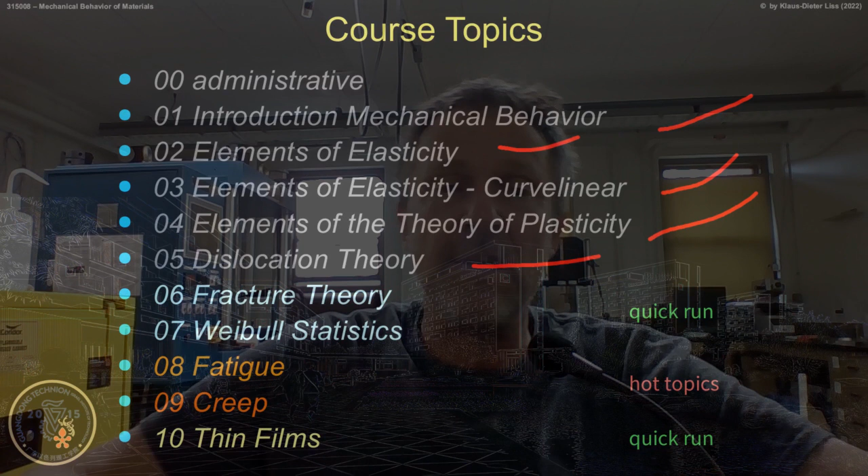There are still 5 other chapters left in the syllabus, namely fracture theory, what we start today, Weibull statistics, that's also about fracturing, breaking, failure. And then we come to fatigue, this is cyclic deformation, and eventually you also get fracture and failure. Subsequently, we get creep, a relatively important topic I want to emphasize in this course. And thin films, and that's about it.

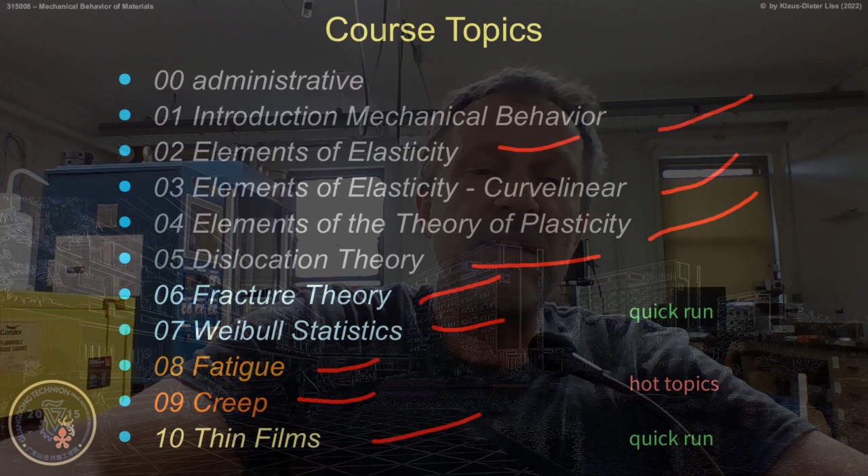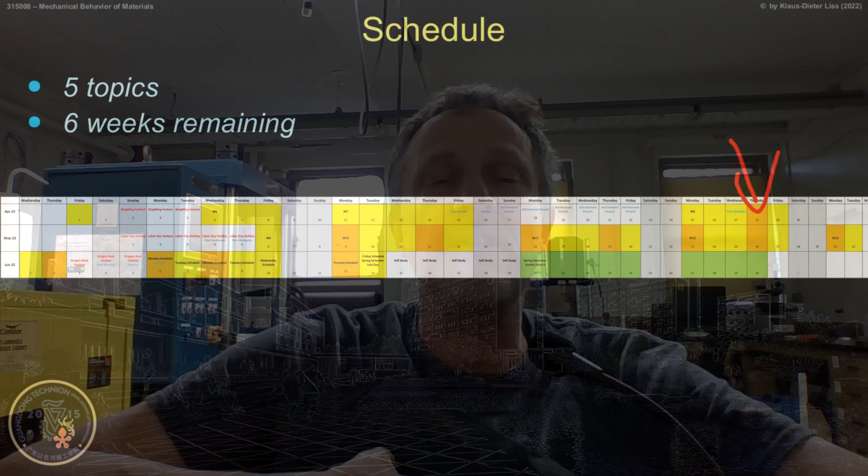So if we look now to the remaining lessons we have, today we are here on a Thursday. Then we have, including today, 12 more lessons divided by 2 gives about 6 weeks we have. Out of the 13 weeks, so we are now 1 week over the mid of the course. We have 6 weeks remaining and we have 5 topics.

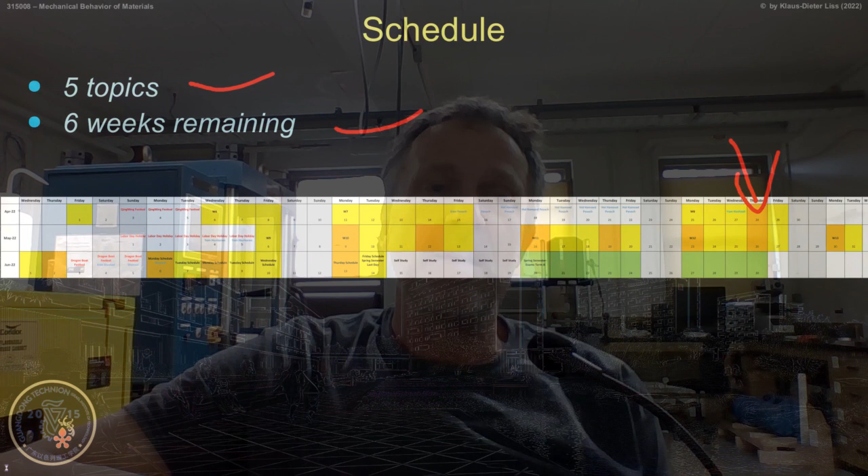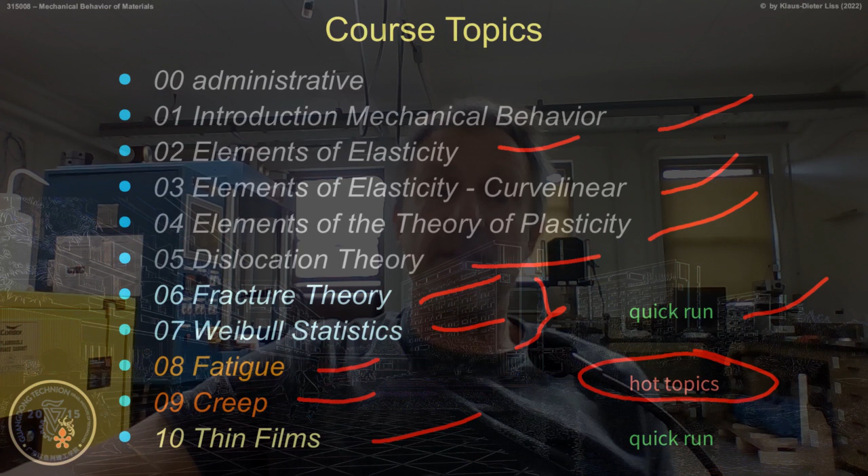You will see the presentation today has about 100 slides, maybe 95 slides, something like that. So I have to get a quick run through some of the topics, namely fracture theory, Weibull statistics, because I also want to spend time on fatigue and creep, which are hot topics in research. And as we are material scientists, not so much mechanics people, we want to understand the physics, what's happening inside the material. And also thin films. I will see how much time I have to talk about the thin films, but at least we should have 1 week for it. So we have 5 topics, 6 weeks.

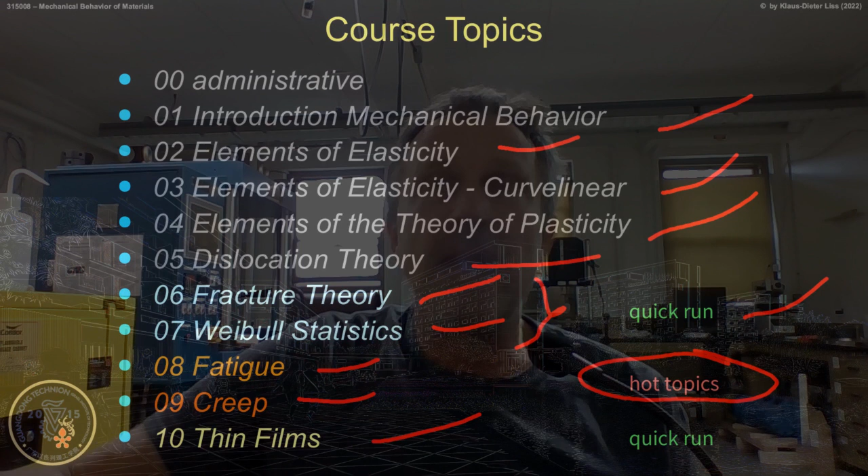I'm sure we're running out of time, so I have to hurry and cannot go into detail of each of them.

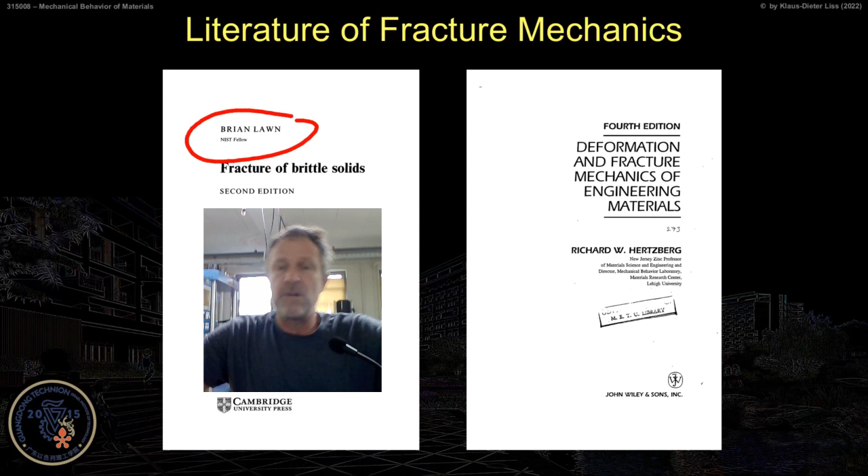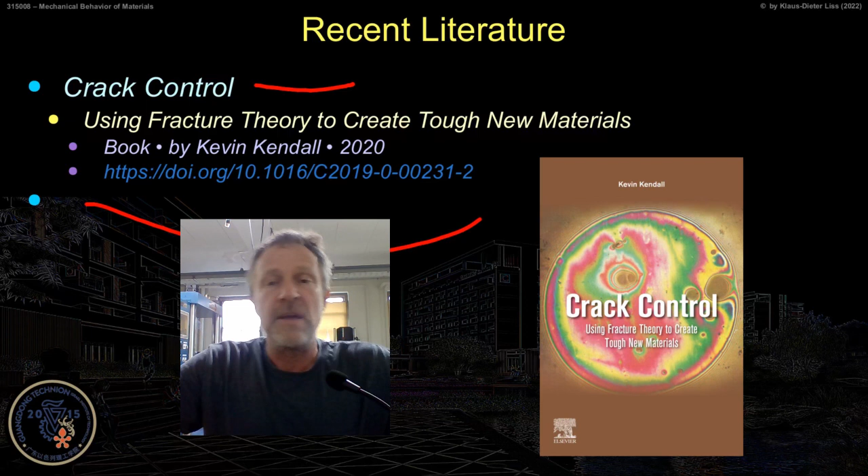And well, actually just today, I looked up, Google is always a good start to look up things to refresh them if you don't know them or want a reminder. And I found this literature on crack control. I haven't read it, but it is using fracture theory to create tough new materials. So it resumes a little bit about the past, about what I will teach you today, textbook knowledge. Not so much teaching, also discussing textbook knowledge, but then how to apply that to create tough new materials. There's a DOI, if you're interested, look it up. If you have a Technion account, you can download it through the Science Online Library.

Okay, let's get started here. This looks very much like at the beginning when we started to look at the theoretical strengths under shear. And we do the same now, looking at theoretical strengths under tension in the atomic potential.

And you remember we have approximated this behavior. So we have a strong force and then we have a not so strong force as we go far away. So we have to overcome a strong stress here, which increases with displacement x or u we had in the past strongly, but then as you go over a certain maximum, it decreases again because of these attractive and repulsive forces and potentials we have.

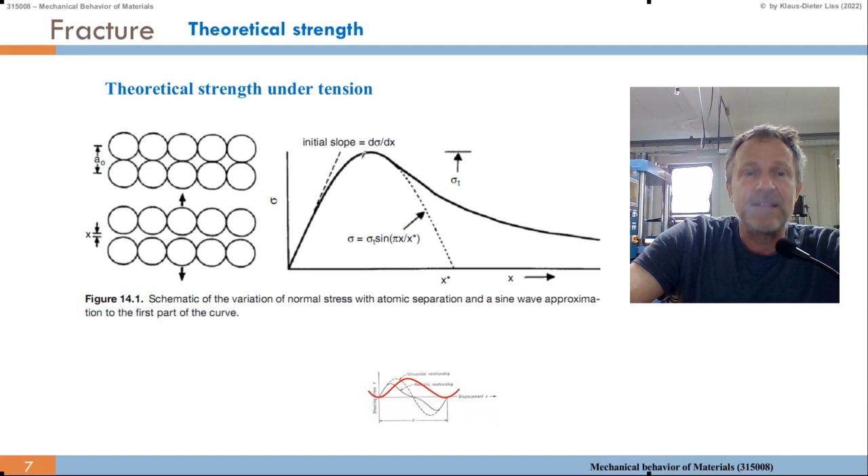We know what happens in the potential landscape when we pull atoms apart: a linear increase to a maximum, then a decrease. We can approximate this maximum by a sine function: sigma equals sigma-t times sine of pi times x over x-star, where x-star is the point where x over x-star becomes pi and it goes back to zero. This describes the slope at x equals zero for small strains and small displacements, and the slope is d-sigma over dx.

So that's the schematic I've discussed already. We assume, as written again, sigma equals sigma-top times sine of pi x over x-star, where x-star is this virtual point.

We assume Hooke's law for small deformation and tension: sigma equals elasticity modulus times epsilon. The displacement-strain relationship, epsilon, is du over dx in general coordinates, which here is x, the change of displacement divided by the atomic distance a0. Back to Hooke's law, sigma equals E times x over a0, and then we get the sigma-x relationship for small deformation, which is this sine function.

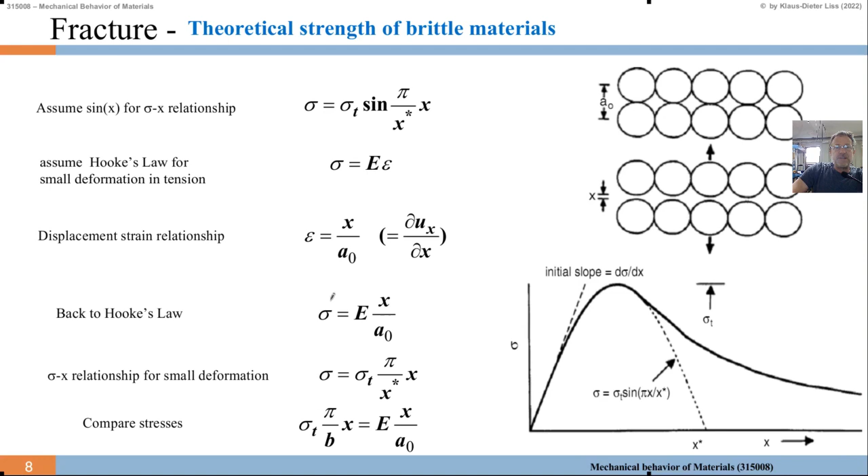We can Taylor expand the argument, giving sigma equals sigma-t times pi over x-star times x, replacing the sine by its argument. Comparing the two stress expressions, sigma and sigma, we get sigma-t times pi over x-star times x equals E times x over a0.

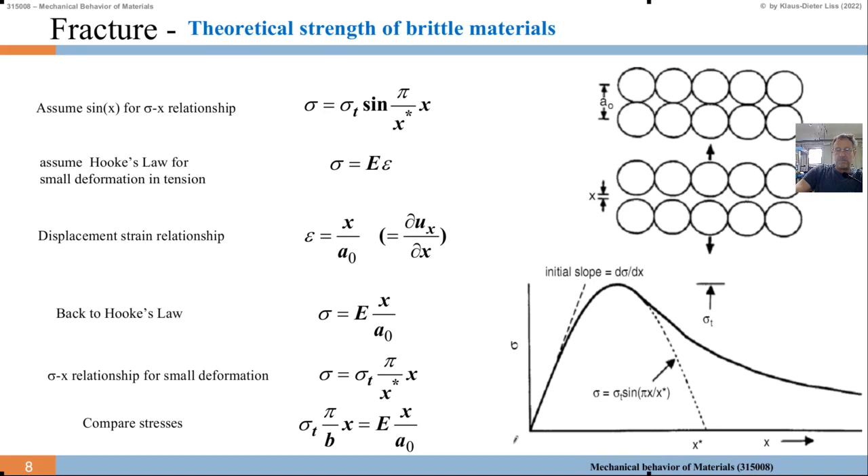We can also assume x-star is approximately of the order of magnitude of a0, and then sigma-t reduces to E over pi. That is the theoretical strength in the tensile experiment when we look at atomic potentials and atomic forces.

The experimental strength in megapascals is often less than 1 gigapascal. Sometimes we have 13 gigapascal for the iron whisker — whiskers are very strong, about 15 gigapascal. The silica fiber, also very thin fibers, 25 gigapascal. But still there is a lot of discrepancy compared to the theoretical strength.

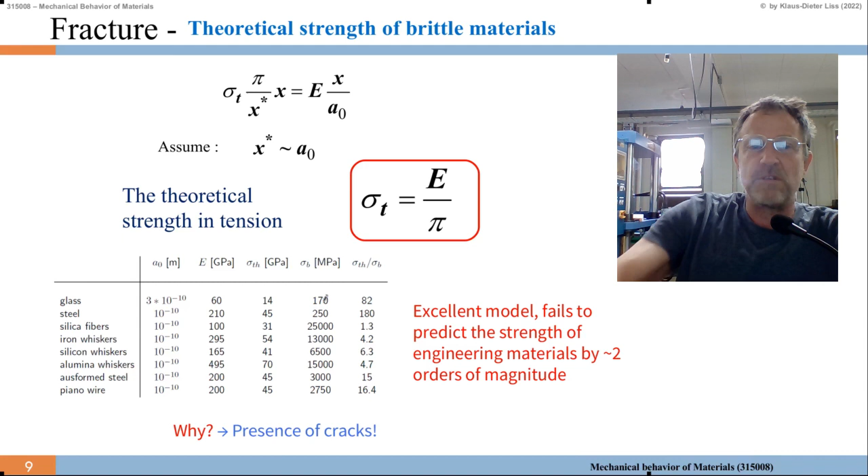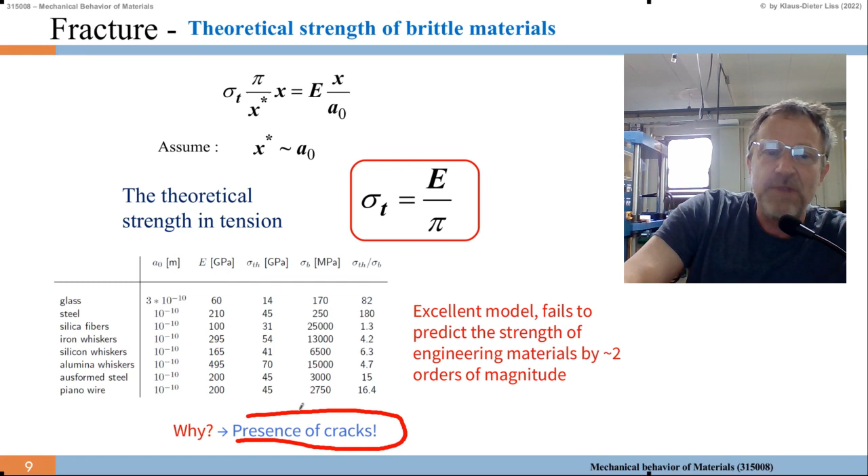So why does this excellent model fail to predict the strength of engineering materials by approximately 1 to 2 orders of magnitude in most cases? This is because, whereas before we had dislocations, now we say there are no dislocations but the presence of cracks — this is for brittle material. Dislocations are for ductile material; here we're discussing brittle material. So what is the weak point in brittle material? The presence of cracks — there are always some inclusions, some distortions.

If we have a distortion, hole, or precipitate — let's say we have a hole — we've done these calculations in the theory of elasticity section, and we know we get stress concentration at the border of the hole, at the surface, at the boundary: 3 times the stress at infinity. If we apply a stress sigma-infinity, it amplifies to 3 times at the surface radius of the hole.

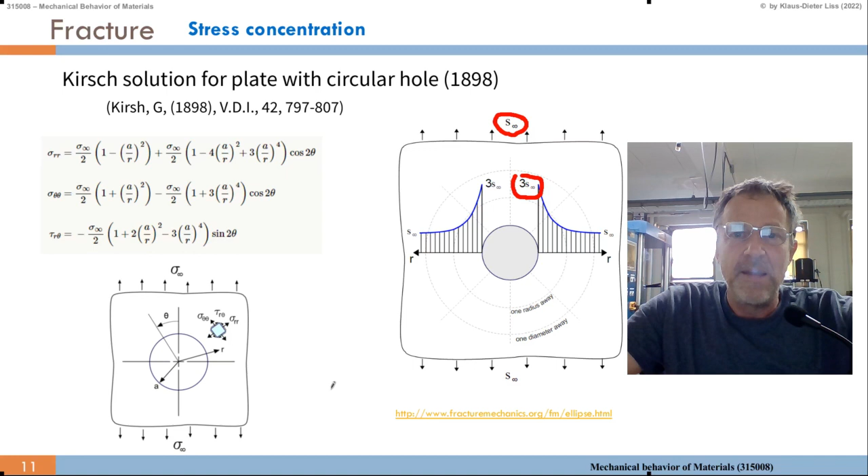One radius away, two radii — one diameter away — it becomes lower and lower. Remember these formulas, you can look them up: sigma-RR equals sigma-infinity over 2 times (1 minus A over R squared), where A is the radius of the inclusion, plus these cosine terms. Looking at the total stresses, they become up to 3 times the stress applied at infinity. This is stress concentration: even if it doesn't yield at infinity, concentrating the stress makes it higher.

Now based on this, Inglis, the author, made this model in 1913 by describing a crack as an elongated ellipse.

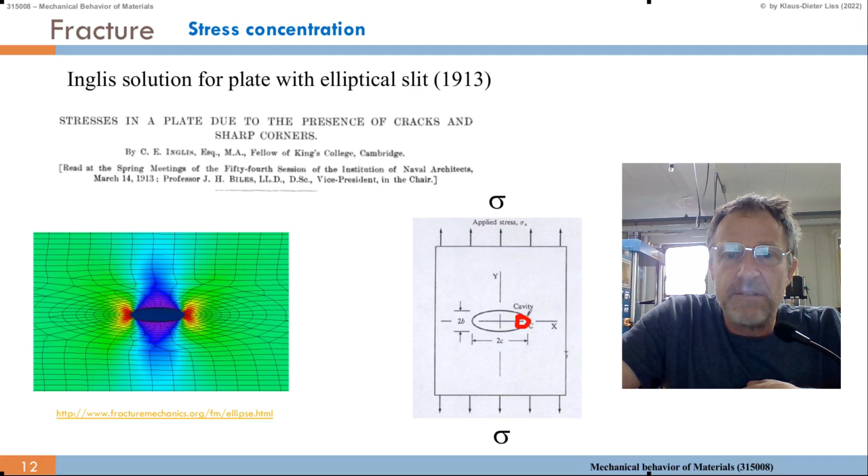The ellipse has some radius of curvature here. If I make it spherical with the smallest radius of curvature here, then I get the highest stress concentration. This scales with A over R, so I get the highest stress concentration at this point where the radius is smallest.

We can write down this solution for a plate with the elliptical slit, which he wrote down in 1913. So I have an opening of 2C, the crack, 2C long and 2B high, wide. That's the crack opening, 2B, it's an ellipse with the two axes. The long axis, or half axis, is C in the horizontal, longitudinal direction, and B, the half axis, so to say the radius,

in the vertical, along Y. And Y is where we apply the stress, sigma A, sigma applied. I mentioned the radius of curvature here in this corner - this is where it is smallest, and where it's smallest we have the highest stress concentration.

We can describe an ellipse like this: x squared over a squared plus y squared over b squared equals 1, or solved for y, it becomes this formula. Then we can calculate, in curve theory, linear algebra, the curvature here, which turns out 1 over rho - the curvature equals y double prime divided by 1 plus y prime squared to the 3/2. This is mathematics on the ellipse.

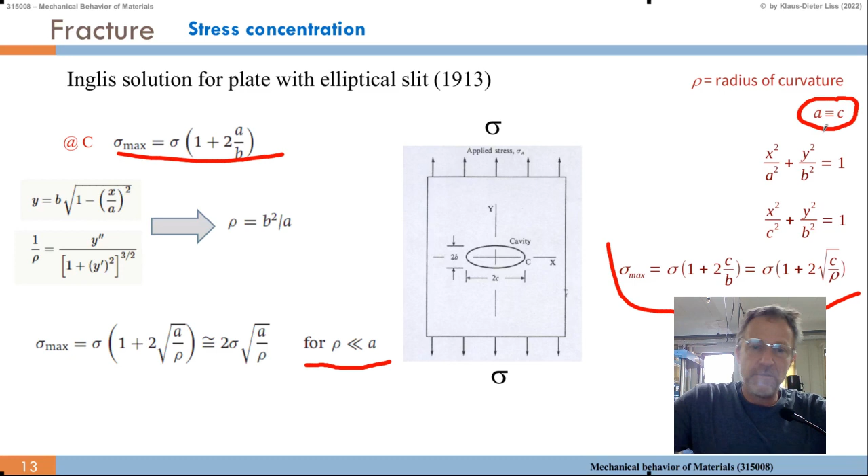Because these slides are mixed, I copy that here again. So let's say now c equals 3 times b, or a equals 3 times b here. Then we have 3b over b - this gives a 6, plus 1 is 7. So sigma max over sigma becomes 7.

If we have the ellipse, we have here the maximum curvature, which is one over the curvature radius, so minimum curvature radius there. And if we apply the stress in the y direction, then sigma critical, or sigma max, becomes 7 - the 6 plus 1. 6 times through the stress concentration, and 1 times through the applied stress. This is the sigma yy.

We also have sigma xx, in this direction here, in the horizontal direction, the normal stress. This also concentrates a little bit, but not so dramatically. Of course, if you pull in the vertical direction, then the vertical stresses become larger. And we can imagine this, yeah?

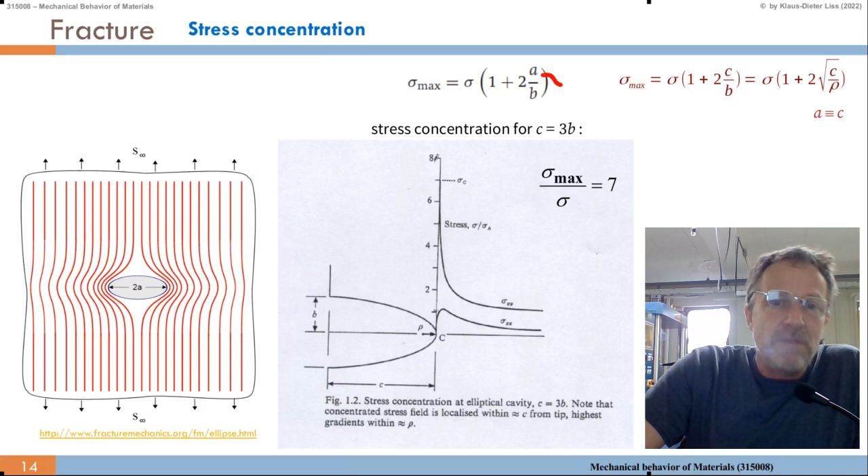We spread the material, and the longer the crack is, the more lever arm we have to the point of the crack tip. We call this the crack tip here, where the rho is minimal. So the long axis of the ellipse is at the crack tip. And the larger the 2a is, the more lever arm I have, and the more concentration of stress I get. So this makes sense physically.

I repeat that here again. So the stress concentration by the half-axis A or C is shown here again, that sigma max equals sigma infinity times 1 plus 2 square root A over rho. Or if we express it in A and B, not in A and rho, then we have the formula here at the top, because rho, you also may want to remember this, is B squared over A.

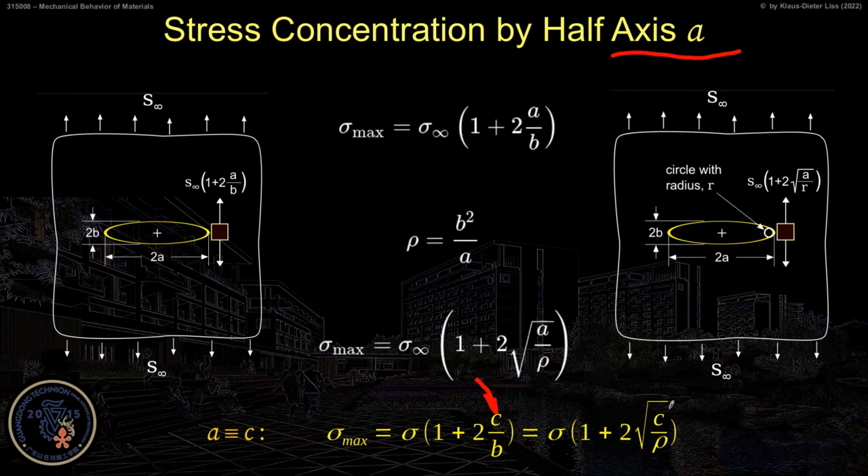And here I have the same formula, just replace A by C, because sometimes we use the C.

So this is the Inglis solution. He formulated that in 1913. Sigma max over sigma is 1 plus 2a over b.

So the question is, can it serve as a tool to predict fracture? Now let's take a small crack. A is 100 micrometer, B is 1 micrometer, so A over B is 100. Putting that in gives 2 times 100 plus 1, which gives 201. So we have a huge stress concentration.

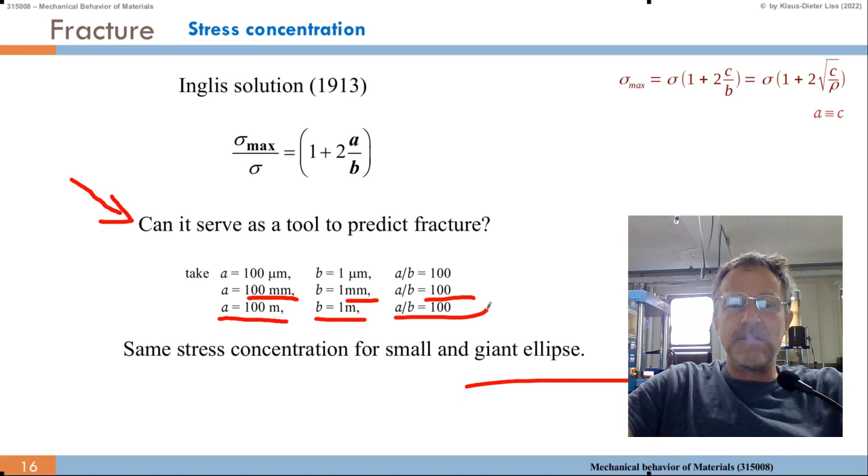But we can also say A is 100 millimeter and B just 1 millimeter, then we have the same A over B ratio. And if we make a giant ellipse of 100 meter length A and spacing B 1 meter, we still have the same aspect ratio, A over B.

So the stresses are the same. If I have a big ellipse, a medium-sized ellipse, or a small ellipse, the stresses around an elliptical hole in a stretched Hookean sheet remain the same as the hole size changes.

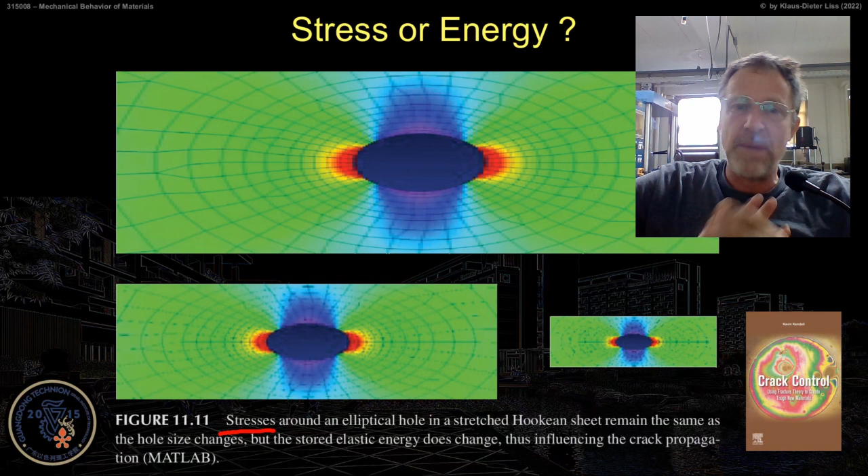But the stored elastic energy does not stay the same, because the stress field in a big ellipse is much larger than in a small ellipse. The release of that stress field and the stress energy can make much more damage than in the small one. That's why it would not scale in an experiment with just A over B.

So therefore we have to consider a different theory, and there Griffith, A. Griffith, of the Royal Aircraft Establishment came into play. He did experiments of bursting tests, bursting balls.

He took these balls, glass spheres, like Christmas balls, hollow inside, just the spheres, and he scratched them with different lengths and depths of scratches, so he could test when they shatter under compressing them. He did it with balls and he did it with pipes.

So he had spherical bulbs, like a light bulb, and he had circular tubes, elongated tubes, something like a light tube.

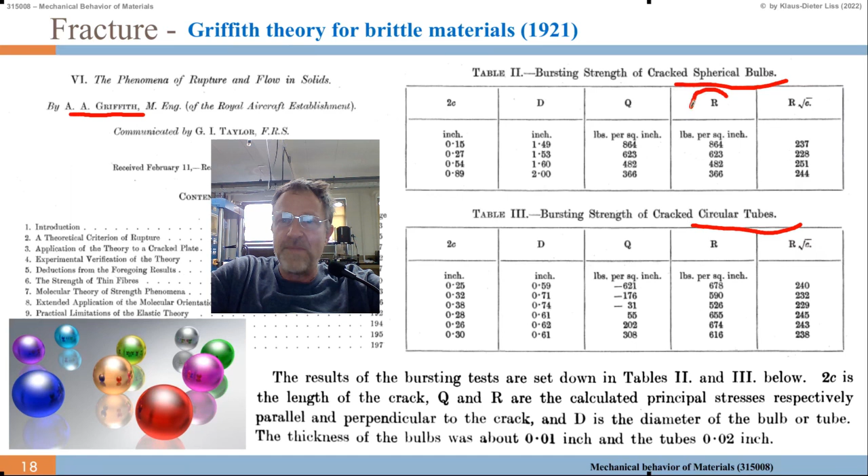2c is the length of the crack. Q and R are the calculated principal stresses, perpendicular and parallel to the crack. Q is parallel to the crack, and R, that's what we're interested in, the higher one, is perpendicular to the crack. D is the diameter of the bulb or the tube, sphere or cylinder.

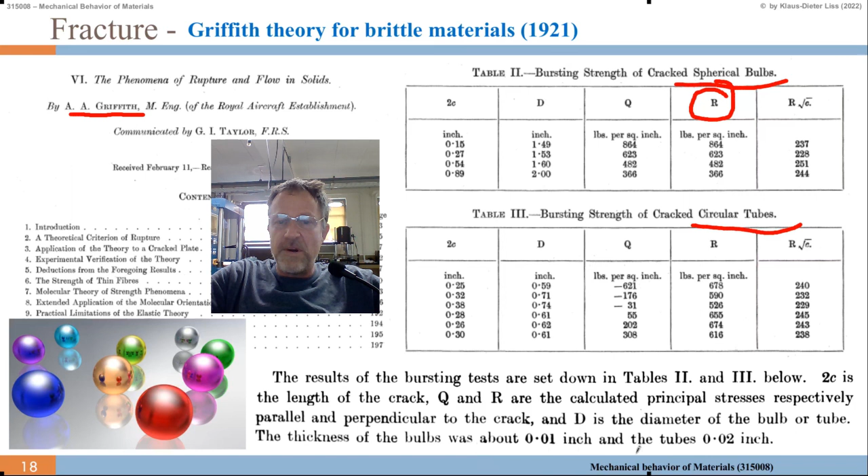The thickness of the bulbs was about 0.01 inch - homework to convert that to millimeter. And the tubes were about 0.02 inch.

He found that R times square root of C is more or less a constant: 237, 228, 251, 244. He also varied 2C a lot, and he also varied the diameter, but R times square root of C turns out to become a constant in his experiments.

He did the same for the pipes, the circular tubes, with different diameters, not varying that much. He had different crack lengths, and then he calculated the hoop stress per square inch to apply, and found, or measured, similar values: 240, 232, 229, so between around 240.

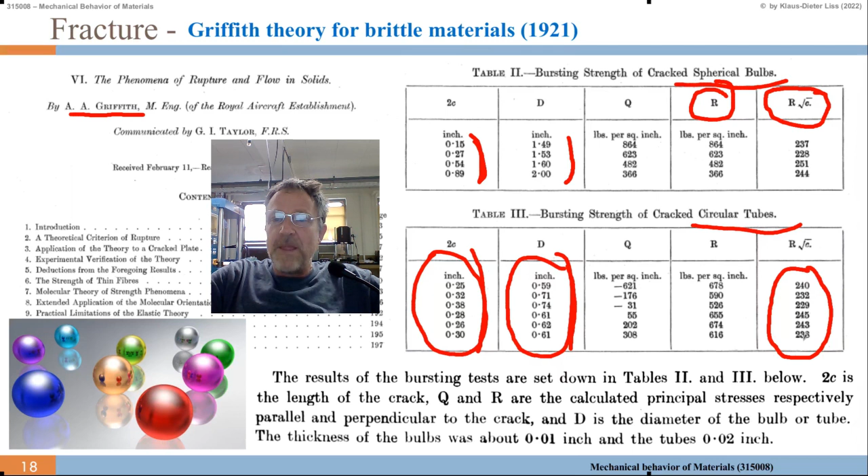You can go through the numbers. So he noticed a constant value in his fracture experiments of glass, namely sigma infinity, the applied stress at infinity, not at the stress concentration, times square root of A or C, is 2.6 times 10 to the 5 Newton meter to the minus 1.5. I just wanted this unit because sigma also is in Newton per square meter. And this is within 5% error.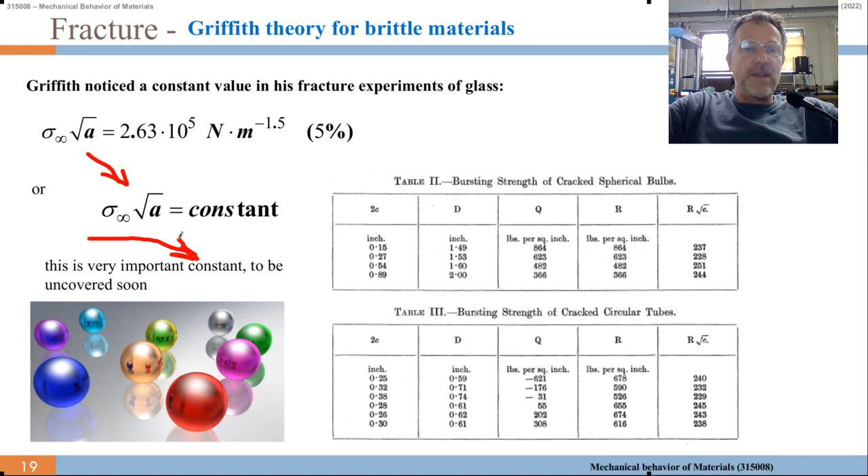Or, in other words, more generally for a material, sigma times square root of A or C is a constant. This is the same table I've shown before, and that's a very important relationship, which we'll uncover soon in this lesson.

So Griffith then looked into the energies, not into the stresses sigma, but he looked into the energy in a reversible thermodynamic energy balance, telling that the total energy equals the mechanical energy and the material energy. So the mechanically applied energy and the energy which is in the material.

With mechanical energy is the external workload, WL, plus the strain energy. So I stressed the material, it strains. And we know already in a strain field we put some energy, UE. And we have the material energy, which here we just say this is the US, the free.

And now we have to calculate the forces we get by sigma times the area A. So A is the area and B is the breadth. If I have the crack in 3 dimensions, the whole body is in 3 dimensions, then this length here is B, how broad it is, the breadth, the thickness of the material. So 2A times B, this is the area. 2A is the crack length, times the width, the deepness, the breadth, is the area A, and we can work it out.

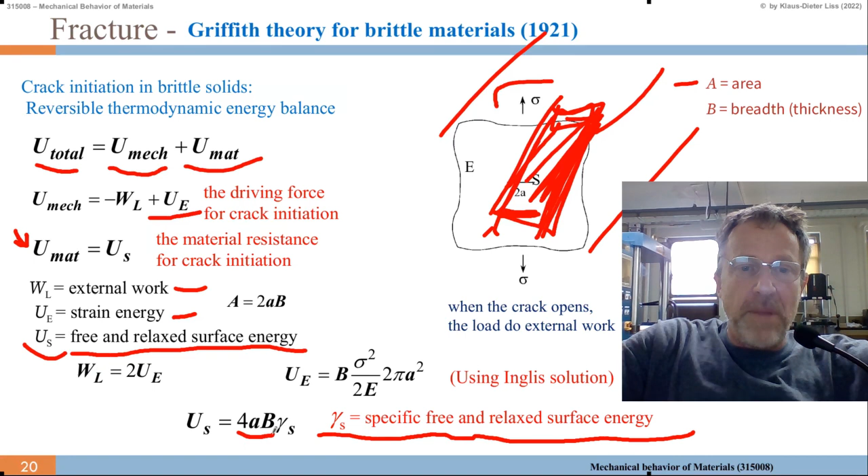So now we look to these different energies. We have the mechanical energy, and we look to the change of energy. So the crack initiation occurs when we have this function here. We have such a function which has a maximum, and du over dA, it's a function of crack length A. If it becomes horizontal, so the derivative becomes 0, then I get crack initiation.

We have these two terms, so d(U mechanical) over dA equals minus sigma squared over E times 2 pi A, and we have d(US) over dA, the surface energy, equals 4 times gamma S from the formula here. So US and UE.

If we plot US as 4 times gamma A, that means if I increase A, then the surface energy just increases linear with the length of the crack. That makes sense, the breadth remains the same. The mechanical energy, which is sigma squared pi A squared over E, and negative, we have the minus sign, goes down.

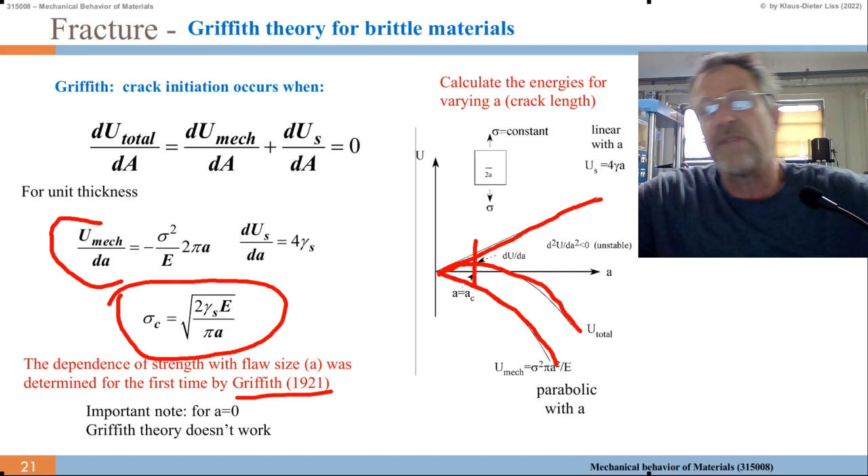So the crack initiation occurs again when du over dA is 0. And we have d(U mechanical) over dA. I think du should be minus sigma squared over E, 2 pi A, and the d(U surface) over dA equals 4 gamma S.

So because the second derivative, the curvature here, is convex, d squared U total over dA squared is smaller than 0, and that means this is an unstable equilibrium. If we are at smaller A than A critical, then the crack may close again. If we are at larger A than A critical, then the crack grows.

And that means if I have a load control case where the applied stress is constant and I go over this A critical, then I have catastrophic failure. And you can imagine that, because again, you have a lever arm, a small lever arm at the beginning, you have to overcome all the surface forces, but then eventually it opens and you get a long lever arm which easily opens the crack tip further. And then you go parabolic down on the energy scale, and catastrophic failure.

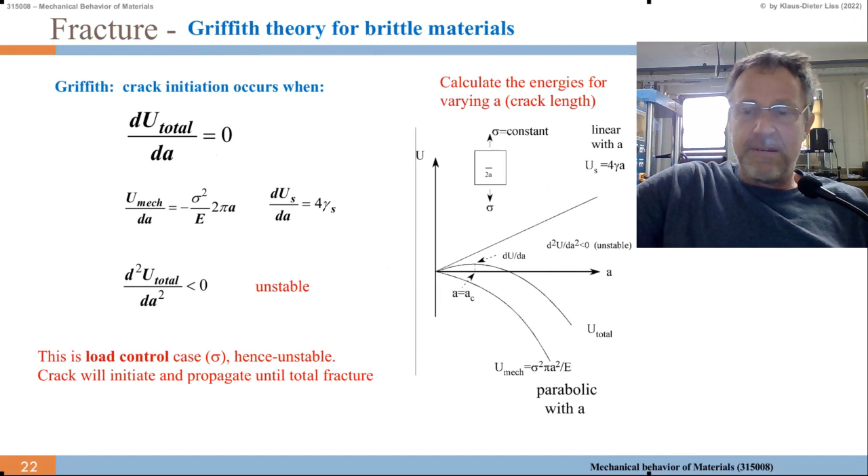Obreimoff did that experiment in 1930. He took this crystal, mica. Mica is a bit like graphite, it cleaves off. So you have lattice planes, horizontal crystal lattice planes, all in a single crystal, and you can cleave planes off. This is a so-called C-plane. It's a very anisotropic crystal.

What he did, he pushed it up here - I looked up his paper. He pushed up part of this cleaved lever arm, a little microbeam, by distance delta. Then he looked how far the crack propagates along this direction, or here we turn it around, the direction in this model.

Now the question is, we consider the problem of a cantilever beam. This is a small cantilever, which has some breadth B. In the Euler-Bernoulli beam theory, the boundary condition input is delta. If we lift it up by constant value delta, then delta equals P times A cubed over 3 E I, where I is the second area moment.

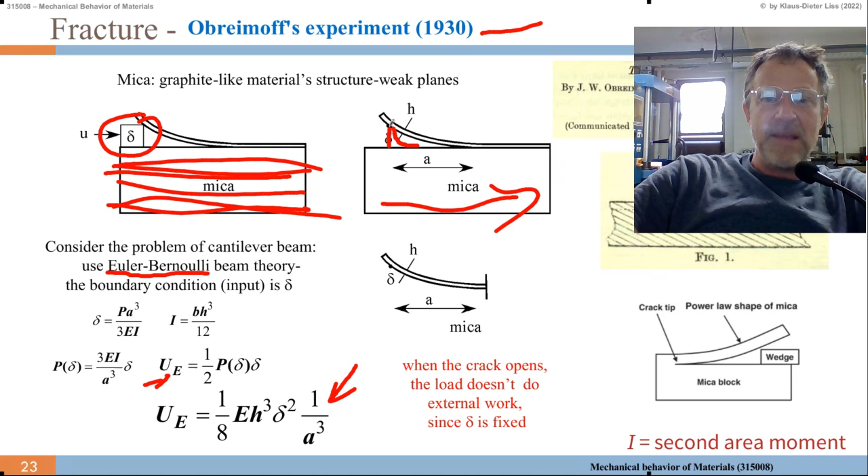And then maybe I start with a crack which is like this. That means the crack will grow, so it will grow until - we show it here - the surface energy goes up with larger A. And we just calculated the UE goes down with larger A, with the third power, 1 over A cubed. All the others are constant.

That means, again, I get a minimum here, but this time I have a concave curvature, open to the top. That means d²U over dA² is larger than 0, and this is a stable condition. That means if I make my crack longer than AC, it would cost me energy, so it would not grow longer than AC. If I have an initial crack shorter than AC, then it opens and opens and opens until it reaches this critical length A.

And of course you can imagine this, right? It makes total sense. If I lift up a piece and it has a steep angle, then I have a large stress concentration there. Now A grows - this is A1, this is A2 - grows, then the angle becomes shallower, and I get less stress concentration at the crack tip. Eventually, if it becomes A3, too long, then I create more surface energy than I would gain with the release of strain energy, so it would not propagate.

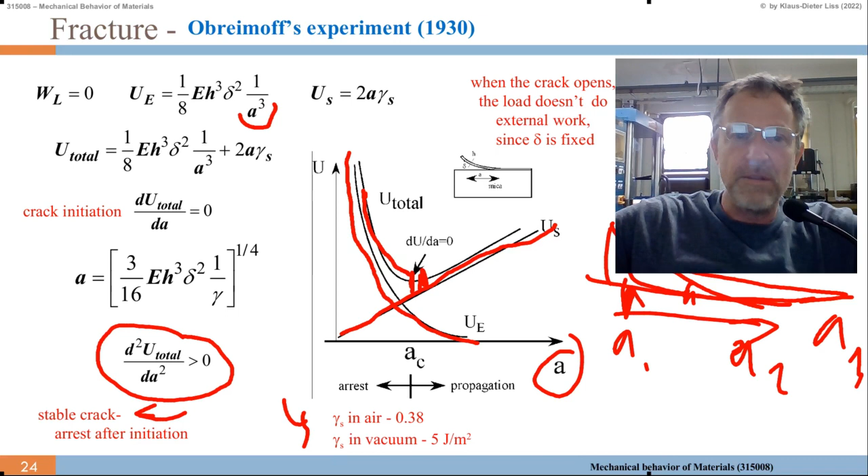So there are two major cases in fracture. The one is load control, shown in the figure to the left - this is unstable crack propagation. Imagine you have this form here. When the crack becomes longer, you have a longer lever arm A to the crack tip, so you put more torque onto the crack tip. That means the stress becomes higher.

Or you have this displacement-controlled situation where we can put it in the middle, for example, just for generality. If we displace and keep the displacement, like with the lever arm now in the center, then it grows to a certain length and it stops growing.

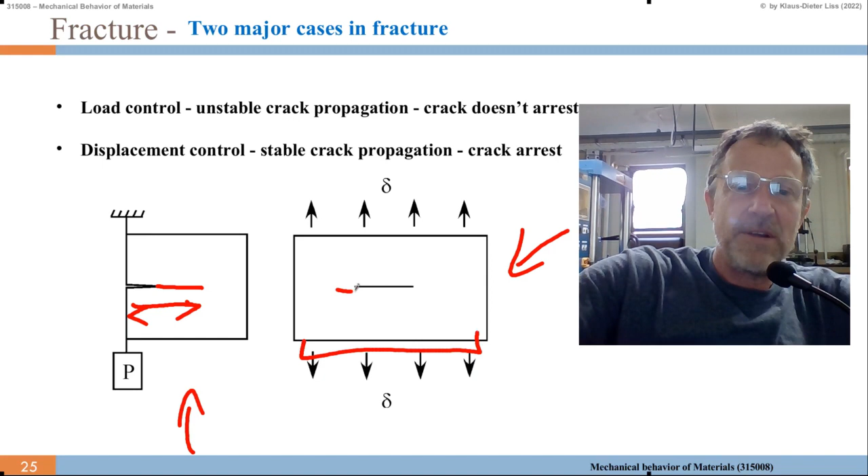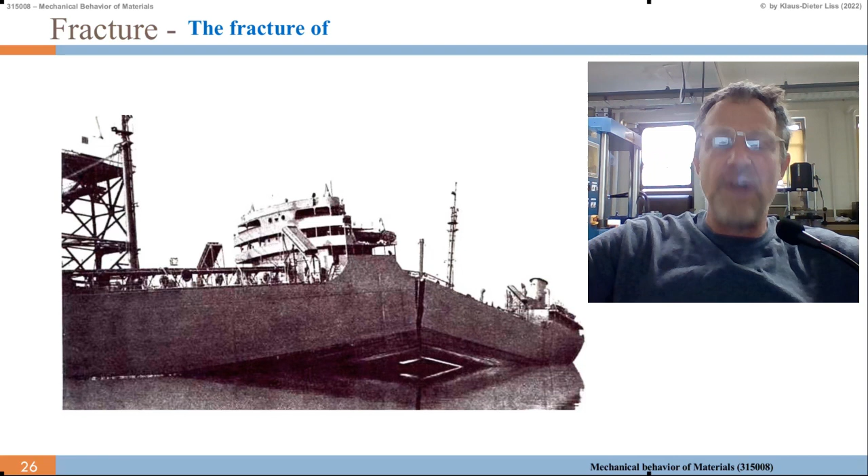So fracture is important because of these problems, as we showed - not just cracking the glass at home or Christmas balls or other nice things we have, but also big problems. We don't want ships or buildings to collapse. That's why it's important to understand fracture.

This was - I forgot where it was.

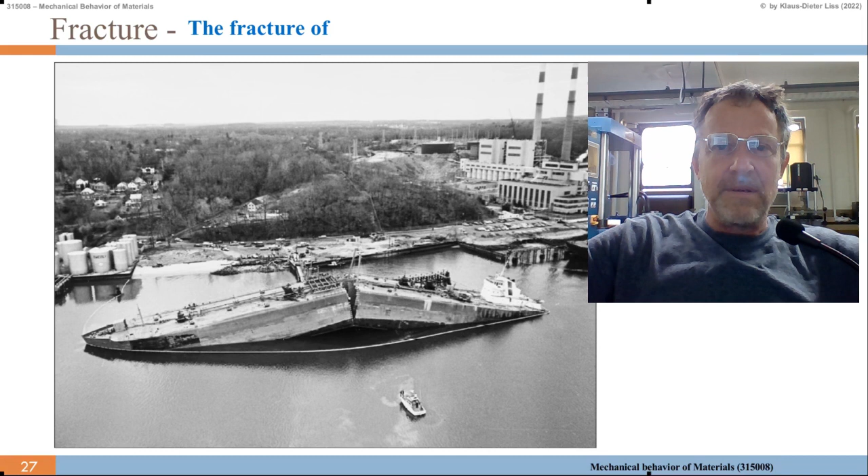In the Griffith theory, we can have two situations: the far field stress is constant and we increase A to some critical A. Or the crack length is constant and we start from zero stress and increase the stress until we reach the critical stress where A starts to move and yield.

And then what we put in for E. So for E, we put in E star, which is E for the plane stress situation. We have had the plane strain and plane stress formalisms in the two-dimensional formulation. You remember the Airy function.

And for E star, we put in E over 1 minus nu squared for the plane strain condition. So when we work it out, for plane strain E star is larger than for plane stress, because nu squared is smaller than 1, so 1 minus nu squared is smaller than 1. That's in the denominator, so it becomes a larger number than in the plane stress situation.

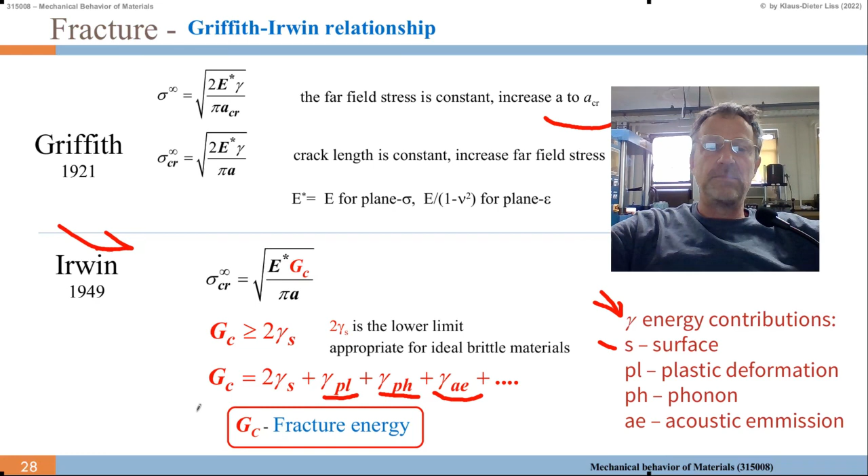So Irwin took the fracture theory one step forward and said the total energy is the workload plus the elastic energy plus some material resistance, Wg. So Wg, workload with respect to this G here, the fracture energy, is some material-dependent resistance.

We have a driving force: the mechanical energy has to balance the workload and the elastic energy. Then U, or d(total U)/dA, has to become zero for the equilibrium condition at the critical A. We work it out: dWg/dA equals G, which becomes a constant G, which we call the strain energy release rate.

SERR, SER, you will sometimes see it written as strain energy release rate. So this is a rate not per time, but per unit area of crack advance, with units of joules per square meter. And G equals d/dA of the workload minus the elastic energy.

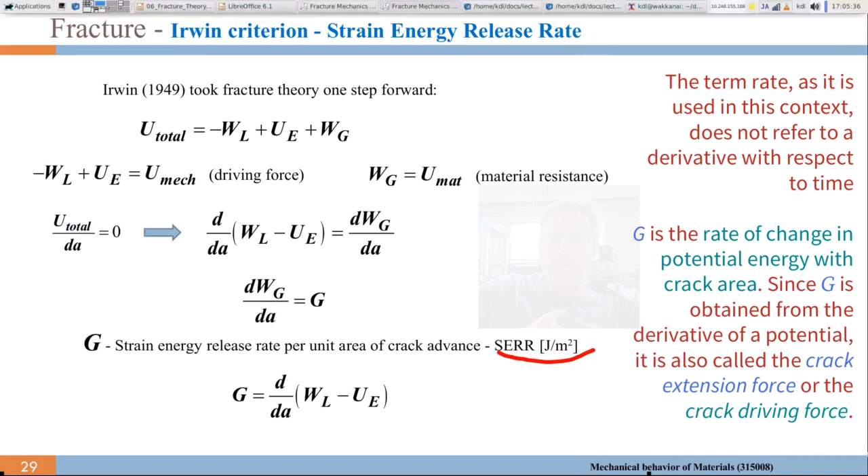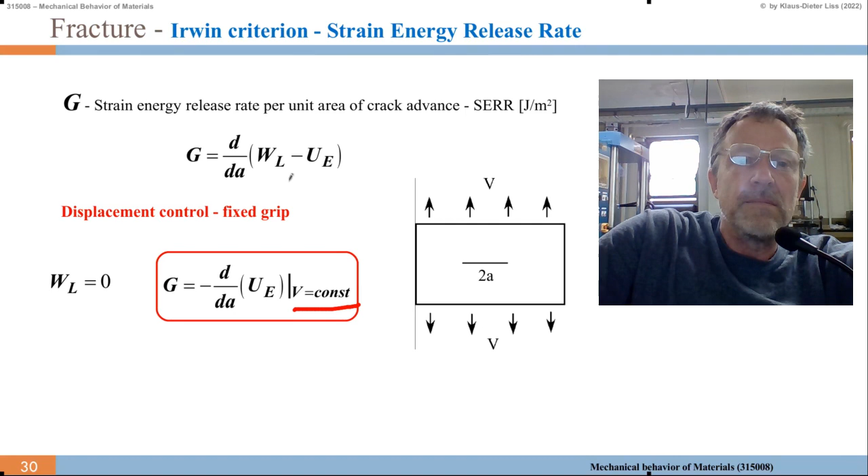The strain energy release rate per unit area, again, I wrote it down here. If we have displacement control, that means a fixed grip, here we apply a stress with constant volume. The volume is the area times the displacement, and the volume is constant. So at constant volume, G becomes minus d/dA times U of E. There's no external workload if we keep the volume constant, since nothing happens externally.

We can imagine this as shown here from this website, fracturemechanics.org, on Griffith's theory. There's a quick geometric interpretation, an easy way to remember Griffith's result, shown in the figure. Think of an unloaded portion of material above and below the crack that is approximately triangular in nature, having a width and a height, pi times A, so A times pi.

This gives an area of pi A squared over two. Since there are two triangles, one on top and one on bottom, not shown here, it becomes pi A squared. Finally, since the thickness is B, in the third dimension we have the breadth B, so the volume is B pi A squared, which matches the volume term in Griffith's equation.

So we have a pi A squared somewhere. The easy way to think of this is there is a volume of material near the crack equal to B pi A squared that you subtract out of the strain energy density sigma squared over 2E. Keep in mind that this is just an easy way to remember the result.

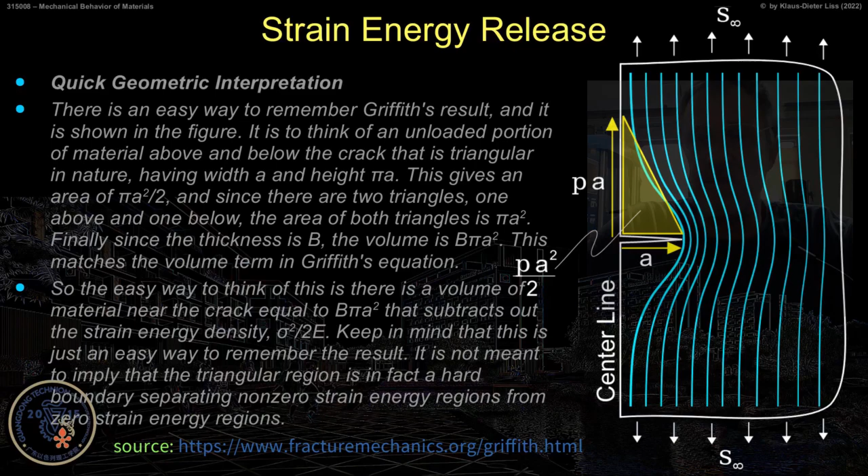It is not meant to imply that the triangular region is in fact a hard boundary separating non-zero strain energy regions from zero strain energy regions. These are continuous variables, continuous fields, as we know.

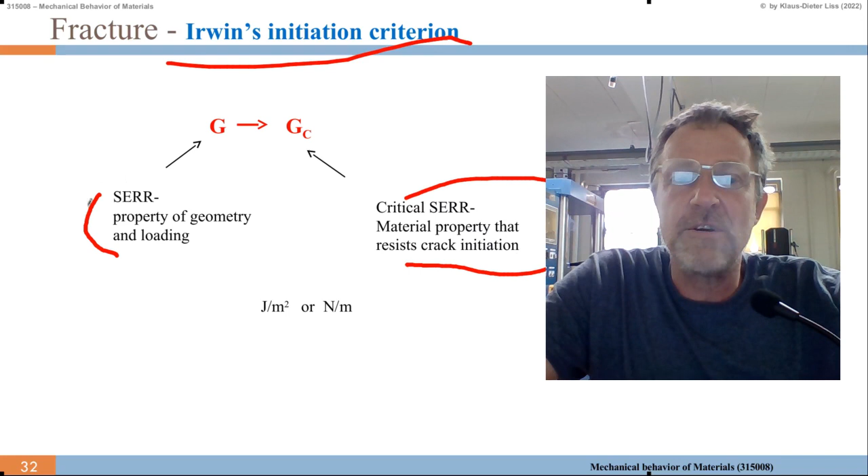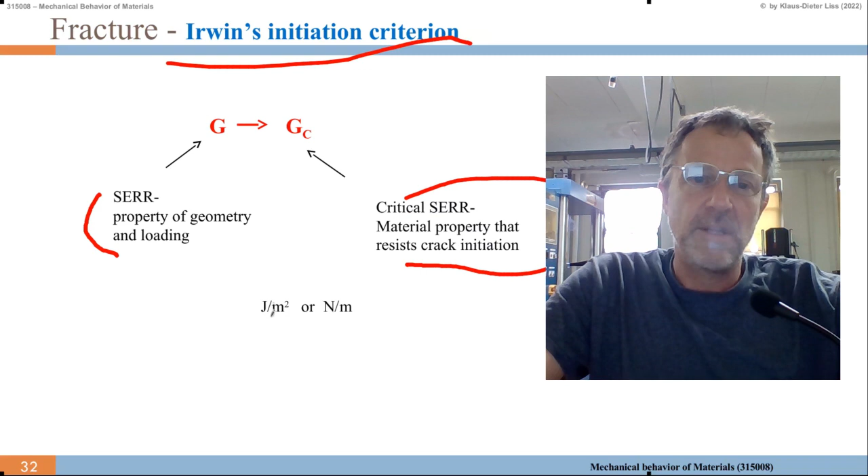So we have discussed Irwin's crack initiation. We have the strain energy release rate, G, which is a property of the geometry and the loading of the material. And then we have the critical G, which is the material property that resists crack initiation. This is the material constant, and we have the geometric load that we compare them against. Units are sometimes joules per square meter or Newtons per meter, same unit.

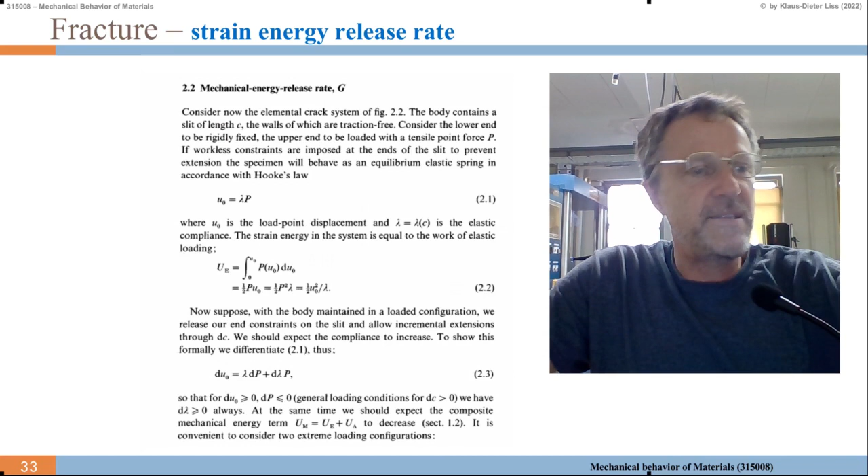We can go through all this formalism here, which I'll let you do as homework since today's time is already over. Go through the textbook and find the load controlled case. Again, this situation where we have a constant load, just a weight hanging across the crack, and the crack propagates, and as it becomes longer, the lever arm becomes longer. So we increase the stress around the crack tip.

And then G equals d over dA of WL minus UE, where WL is this square and UE is this triangle here. So we can say it's the opposite triangle, pi. This energy, volume times stress, or force here in Newtons, gives the energy. So G is the release rate, d pi over dA. Pi is WL minus UE.

External workload, and the workload is P times V. So it's this square. V is here, P is there. The square is the workload, P times V. We know that from thermodynamics.

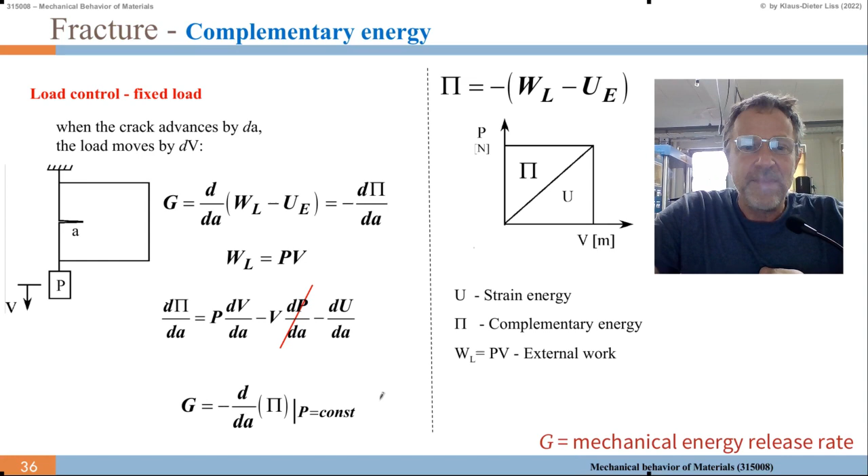So d pi over dA equals P dV over dA minus dP over dA times V, which is zero because we keep P constant, minus dU over dA. That gives us the strain energy release rate equals minus d over dA of pi at P equals constant. So that's the change here.

We have displacement control and load control. I just mentioned load control. If I have a crack length A, this is my pi, the upper triangle here. Now I increase by dA, and of course I change the slope, and I get this d pi, which is minus G dA. That means G increases with increasing A.

Not so in the displacement control. There, I hold the volume fixed at this value, but I grow my crack from A to A plus dA. Then I have a dU E which becomes minus G times dA, and the G reduces. The G has to reduce to keep the volume constant. So here the G reduces and there the G increases.

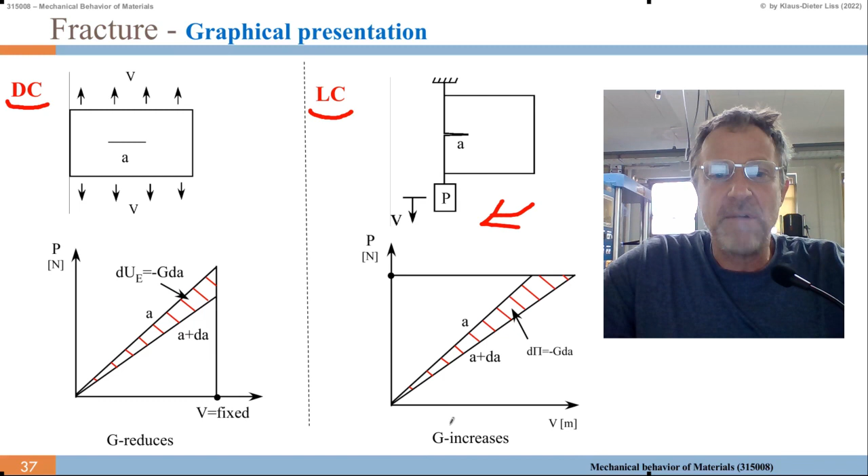And that's why on the left we get, at some stage, the G reduces under the critical G, and the propagation of the crack stops. While under load control it increases and increases, and we already know it increases with the second power of A, the length of A.

The same thing is shown again here. Again, I have to rush, so look it up in the textbook. There's an example, the same example I've just shown.

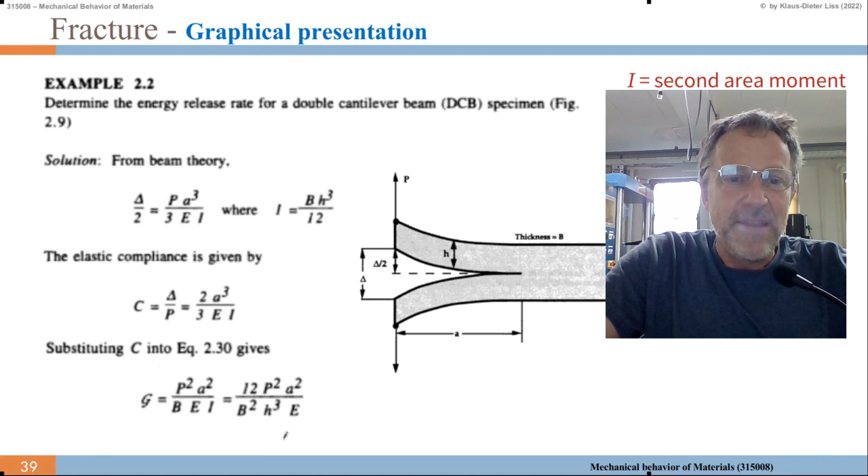In that splitting of the mica, but here you split it to both sides, top and bottom. So we have the same solution as before, just a factor of two, and G becomes this equation here, so it goes with A squared. I'll let you do that as homework as well.

So much about general theories. We have had the Griffith theory, the Irwin theory, and the Inglis ellipse at the very beginning. So far we discussed the energy approach for fracture. Next time I will show you what happens at the near tip stress, what happens on an atomic scale, very close to the crack tip.